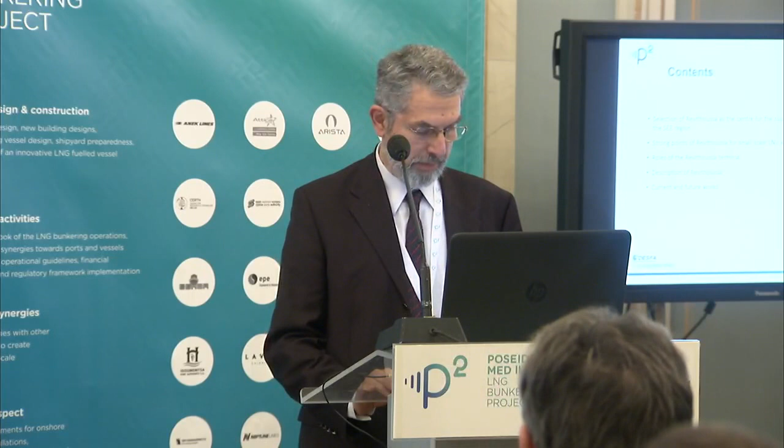Thank you, Chairman. Ladies and gentlemen, I'm Joseph Florentin, project manager for Poseidon Med II on behalf of DESFA, and head of the new projects department in DESFA. What we are going to see in my presentation is how Revithoussa was selected as the center for the supply of LNG bunkering fuel in Greece and in the southeastern Europe region; the strong points of our terminal for small-scale LNG activities; the roles of the terminal; a description, which is useful for those who have not yet had the opportunity to visit the island; and our current and future works.

Revithoussa is at the center of the Poseidon Med II action because it was selected in the previous Poseidon Med program against two other options. One was the installation of large LNG tanks in the port of Piraeus, and the second was the installation of a floating storage unit outside the port.

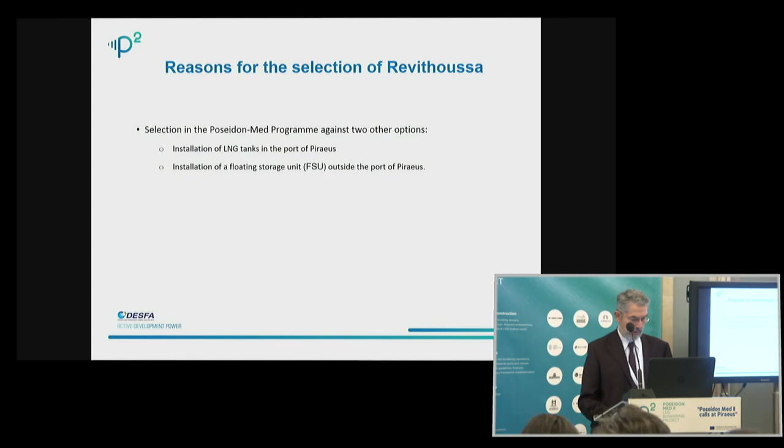Why was the Revithoussa option retained? It was retained for all these very important reasons: it is at short distance from the port of Piraeus, 17 to 18 miles; it offers easy permitting of the additional infrastructure compared to the case when we want to create grassroots installations; it offers, and this is equally important, open access to all users without creating any constraints for the ship owners regarding their LNG suppliers; and last but not least, we have experienced personnel, proud of almost 17 years of safe operation.

Revithoussa fulfills several roles. The existing ones are that it is the most important entry point of the national natural gas system. The other two, as you may know, are one at the Bulgarian border and one at the Turkish border. It covers peaks in demand.

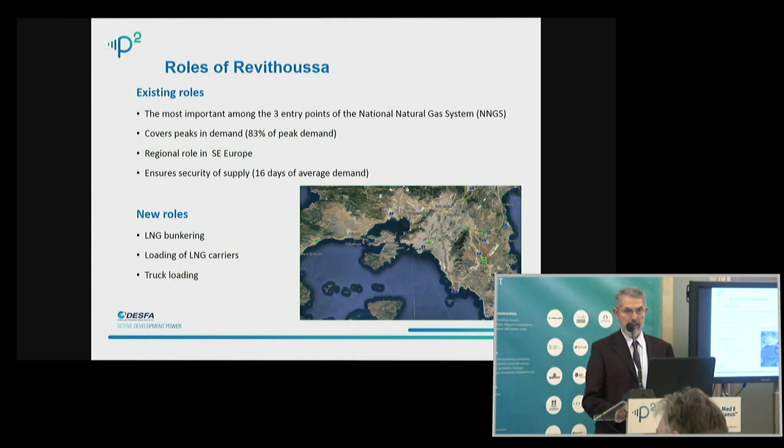It plays a regional role in southeastern Europe, especially nowadays when it is already technically possible to send gas to Bulgaria. And it ensures security of supply, about 16 days of average demand. The new roles for which we are working are LNG bunkering, loading of LNG carriers, and truck loading.

Let's see now a description of this island. At the center, we have two tanks of 65,000 cubic meters each, and the regasification area, the process area. This is the unloading jetty at which the LNG carriers are berthed. And when the gas, the LNG, is regasified, it follows this way up to the send-out point to go to the continent. We have a cogeneration plant which covers all the electricity needs of the island, and the control room.

Concerning the new installations, the prospective installations, a third tank of 95,000 cubic meters is already under construction. If you see a more recent Google picture, you will see that the works have indeed progressed. In this place, the truck loading station will be built, and this is the area designated for the new jetty that will be dedicated to small-scale activities.

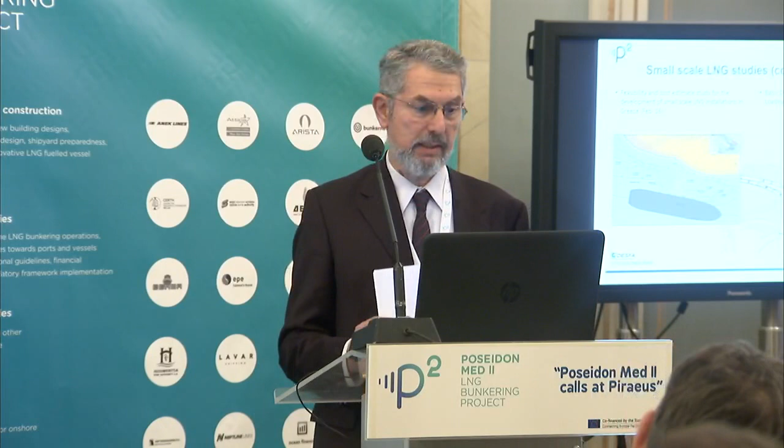What has already been completed is the feasibility and cost estimate study for the development of small-scale LNG installations, whose result was the selection of the position for the new jetty, and also the basic design for the construction of a truck loading station.

What remains to be done: very shortly, until the end of the year, we will submit the preliminary environmental study for the truck loading installation and the new jetty. We will complete the tender documents for the EPC contract for the truck loading station. And we will issue a tender for the conceptual design at 4 ports of the Poseidon Med II program.

Early next year, we will issue the tender for the basic design of the new jetty. And at the end of 2017, although this is outside the small-scale sector, we expect to have the possibility to load large LNG carriers. The ships that now can only be unloaded, we will be able to load them as well. In 2018, the operation of the truck loading station will start.

And at the end of 2018, although this also goes beyond the Poseidon Med II program, we expect to have the possibility of loading small LNG carriers with the addition of a new arm on the existing jetty. So, from our side, we expect to be able to supply the first ship with LNG well before 2020. Let's hope that everything will run smoothly and the expectations will become a reality. Thank you.

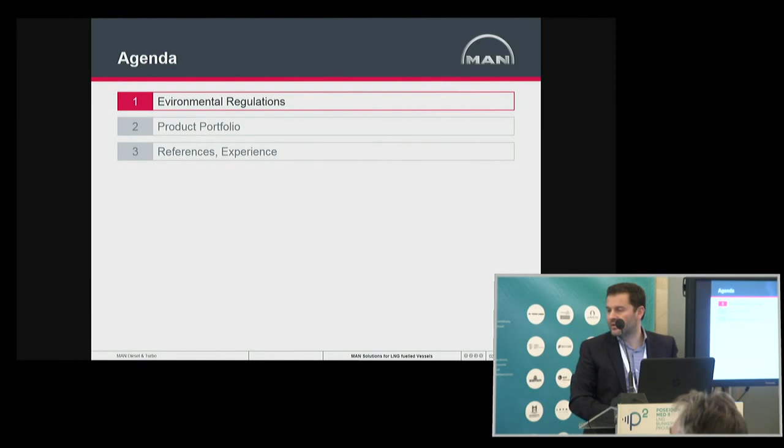First of all, as far as I have seen in the previous sessions, you allocated a lot of time talking about environmental regulations, so I will not stay on this, just to highlight that we already have established ECA areas, mainly in the US and the North Sea, and in the forthcoming years new ECA areas most probably will come into force. What is granted is the escalated sulfur content that we have to comply with in the next years. We see also in this graph the development that took place over the last many years in terms of SOx emissions and NOx emissions.

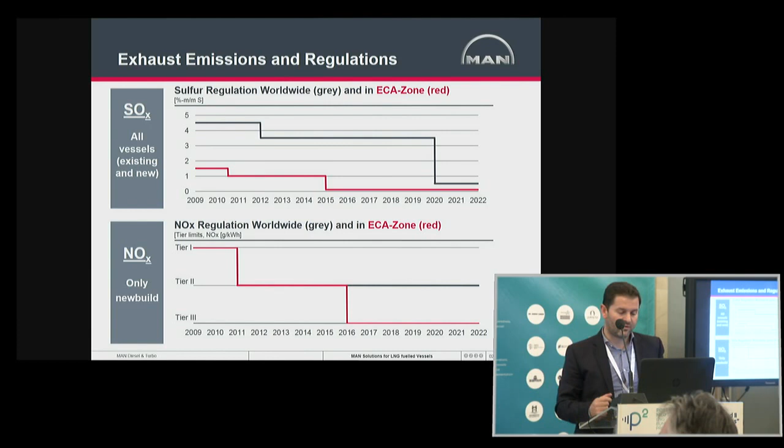We see that by 2015 and 2016 it will become more strict. And of course by 2020, especially for SOx emissions, we will be enforced to burn fuel oil with very low sulfur content. What we have done, what we were trying to do, is to reduce the SOx, the NOx, and the CO2. There are some examples of how we are doing this via scrubbers or EGRs or high-efficiency powertrains, but the answer to most of them is the use of gas.

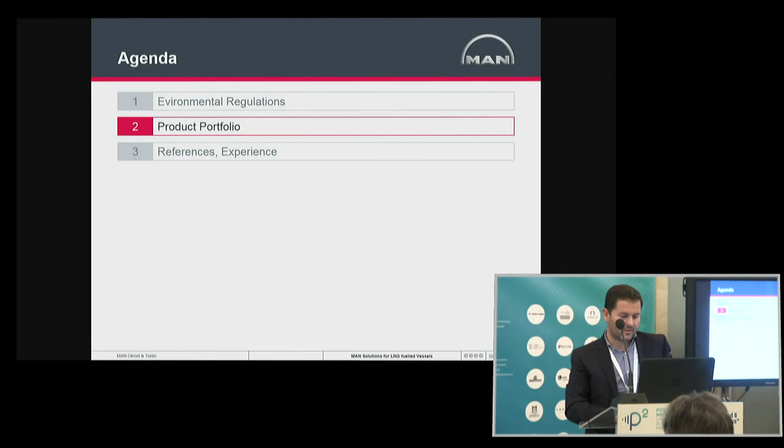Now, product portfolio, what we can offer you. I took up as an example the RoPax model, where we can offer from the gas storage and supply system, the gas valve units, the dual fuel engines, 4-stroke at the moment for this type of vessels, up to the propulsion system, up to control and high efficiency propellers.

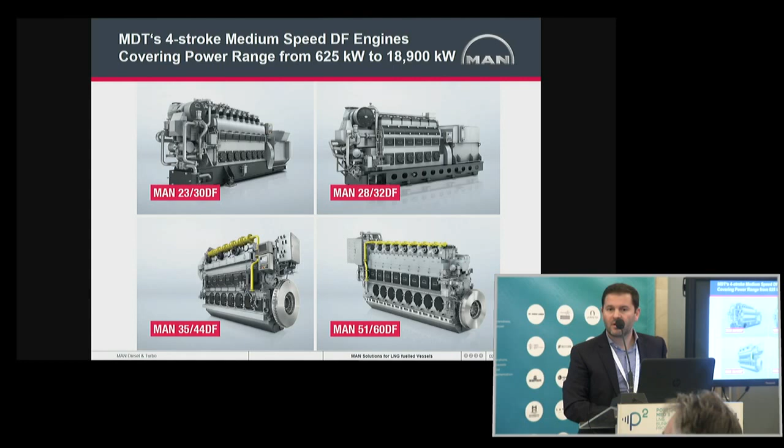More specifically, we have a huge range of dual fuel 4-stroke engines from around 600 kilowatt up to close to 19,000 kilowatts propulsion, but also electrical generators in the vessels. And because very often we are asked what happens now and how we can prepare ourselves in the future, almost all of our engines can be easily prepared to burn LNG some years after.

Here is an example of a dual fuel oil engine prepared that shows some parts like, for example, the gas pipes, the gas valves that have been already installed and can be used afterward quite easily with some minor changes also to burn LNG.

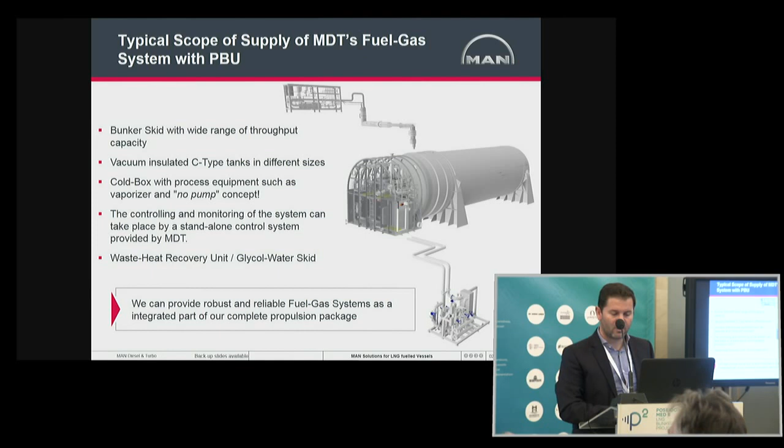We can supply different types of valves and we can also supply C-type tanks with cold boxes and the whole train of the treatment of the storage system. This is the example of a 4-stroke setup, but also we have a presence for the 2-stroke engines.

The well-known, in the last 2-3 years, ME-GI engines, which is actually the version of the existing 2-stroke ME engines. We can deliver new engines from 2013 already prepared to burn also LNG, but not only LNG, also ethanol, propane and other alternative fuels.

This is another example of a vessel, a container vessel, which actually is a reality nowadays, where we show how we develop this system and how we arrange in the engine room the whole system: the main engine, the electrical power, the electrical generator engines, and of course the gas valve system, the compressors, and the fuel tanks.

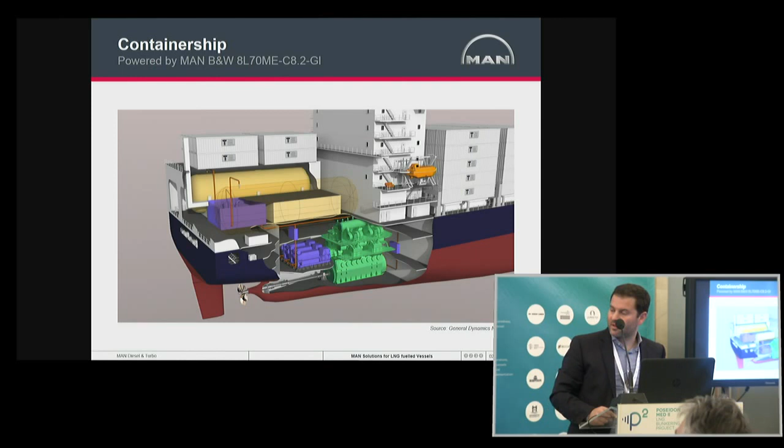So, in one slide, the MEGI and LGI, where they can burn alternative fuels, don't have the methane slip effect. They can easily operate in heavy weather conditions, and it is already here. We have already thousands of hours in operation for a couple of vessels that operate mainly on the US coast. However, we are not only for the diesel engines, we are here also to propose rotating elements.

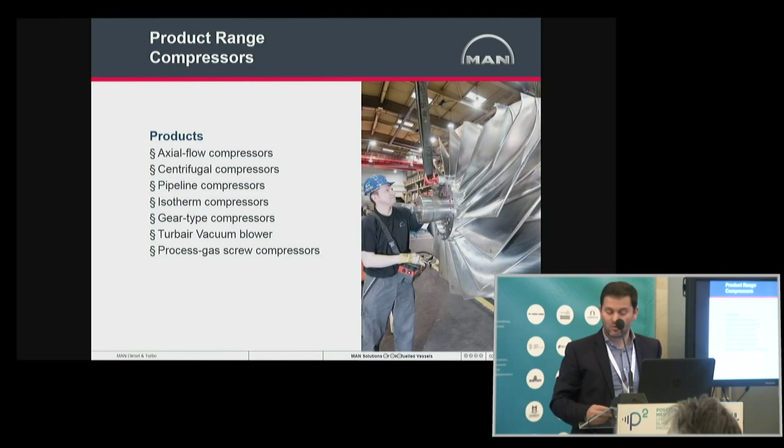More specifically for gas transportation and gas storage, we can propose a large number of compressors, gas compressors, but also for power generation, gas turbines of various sizes. Here is an example about the range of the outputs that we can supply in the market.

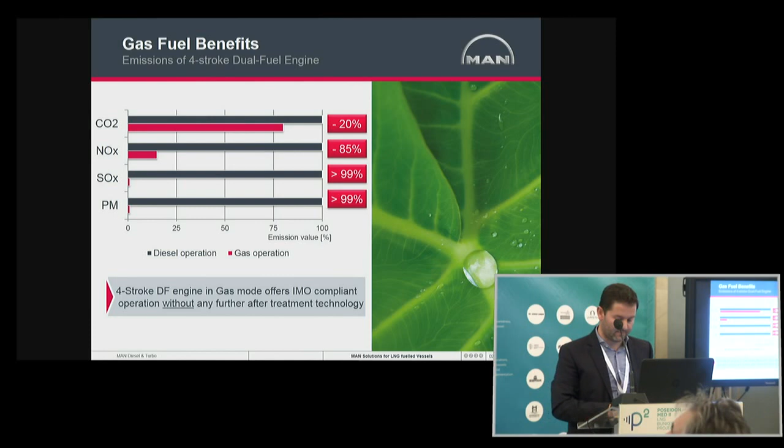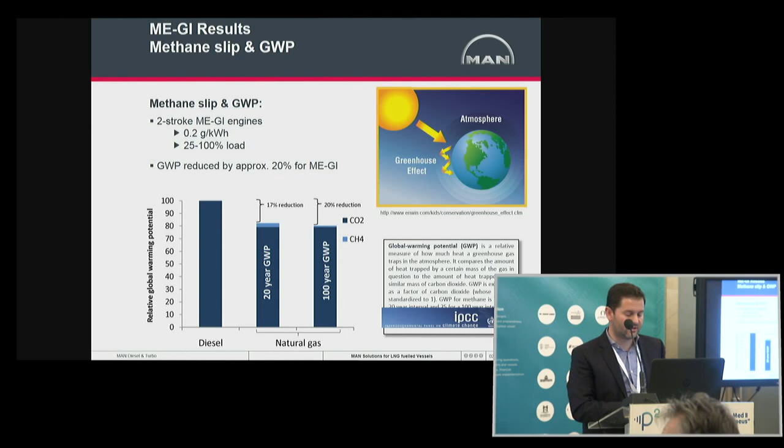And in regards to reference and experience, we have executed several projects, new projects and retrofits, of course. For four-stroke, for example, we are converting right now under the German state austerity program one small container vessel, quite young, built in 2012, and we will offer the entire package of equipment that I showed you before. It means from the gas storage up to even the propeller, and to improve also the operational profile of the vessel.

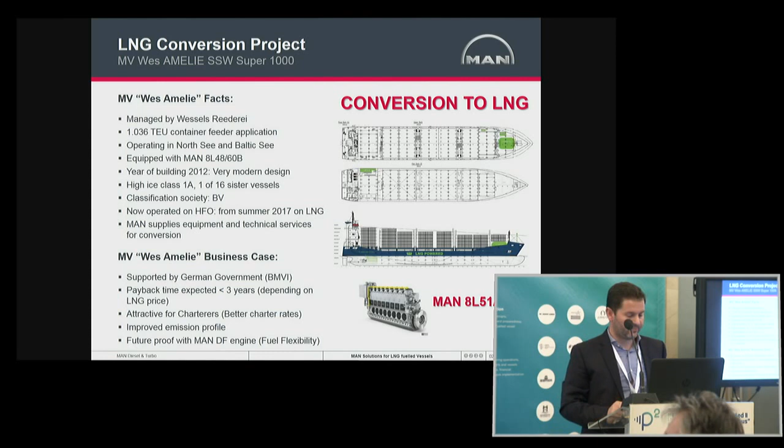We have decent experience, close to 8,000 hours now, where all the initial problems have been solved, and the vessel is running under very normal conditions. The only problem faced by the operator is that on one side of the route, they cannot find LNG yet, and this is what the industry has faced. So we operate half of the route with HFO, again without any problem.

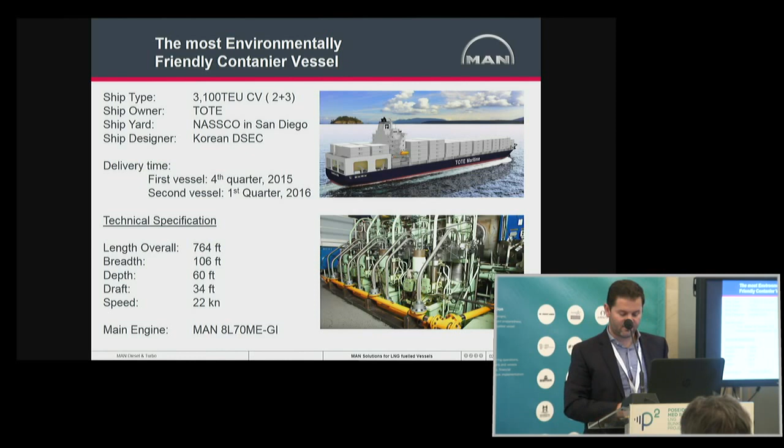Also another order which is ongoing with ethane fuel oil for Hartmann Reederei, with the full equipment that we can offer, including CPP propellers, shaft alternator systems, and other peripheral equipment.

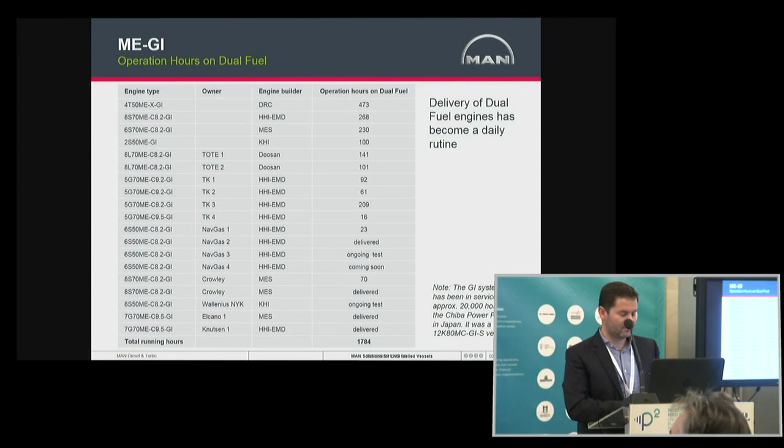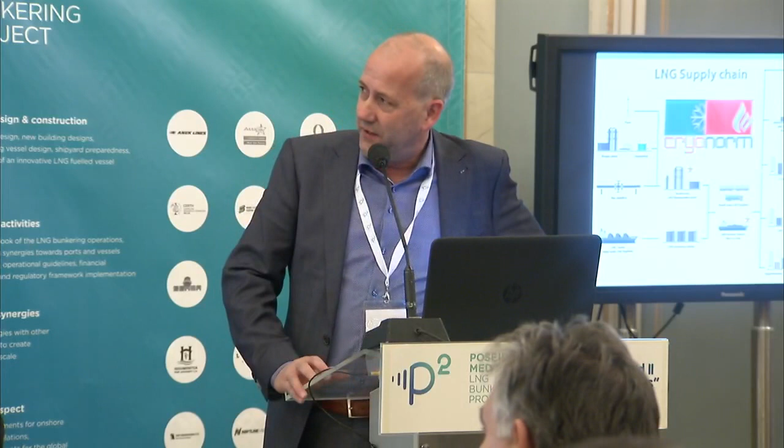For the LNG, we are active everywhere. So our company is building small-scale LNG infrastructure, from small-scale liquefaction plants, LNG logistics, LNG bunker terminals, LNG fuel systems on ships, LNG and LCNG filling stations for vehicles, and also LNG storage and regas plants.

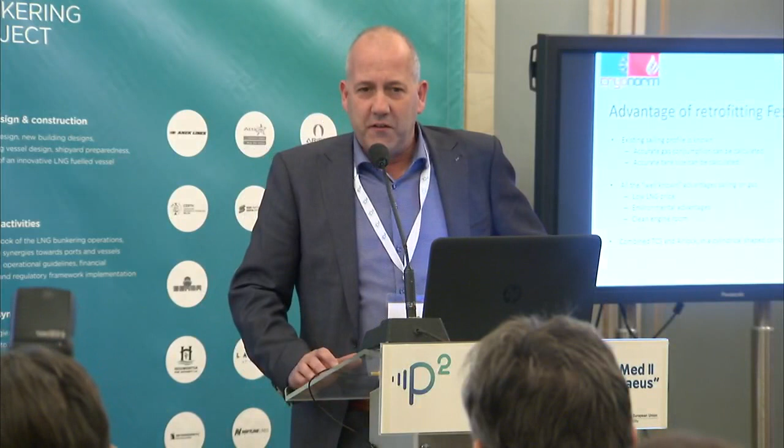The retrofit of Festos Palace to dual fuel LNG - we have done a basic engineering study to see the possibilities of retrofitting the Festos Palace. The advantage of retrofitting an existing ferry is that we have accurate gas consumption data, and we know from experience over the years what the ship is using.

So we can calculate the accurate LNG tank size. Well, all the well-known other advantages are there, like low LNG price and environmental advantages. Another thing is that the engine room will stay clean if you sail on natural gas instead of diesel.

This graph gives you the fuel consumption, the gas consumption of the Festos Palace.

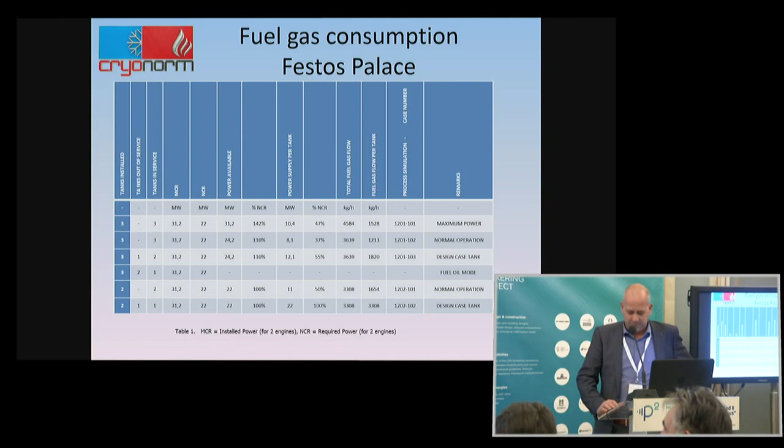The challenges we had for retrofitting the Festos Palace is the heavy and large cylindrical type C tanks, which need to be installed on the existing structure of the ship. So we needed extra construction works on the tanks, which have 5 saddles under each tank. And we have 3 tanks of 150 cubic meters.

Another challenge was to find a suitable pipe routing for the LNG bunker lines from the bunker terminals to the tanks or to the tank connection space, the natural gas pipes to the engines, heating lines, and the location of the vent lines.

The other challenge is we have to find a good spot for the bunker station with the airlock. Our idea was to have a second bunker connection on the car deck for bunkering truck to ship.

This is a schematic overview of the overall system. This is from the ventilation system, but it also gives the idea about the complete system as we have designed it. You have the gas feed to 2 engines, 2 main engines, 3 tanks, 3 tank connection spaces, 3 airlocks, and 2 bunker stations.

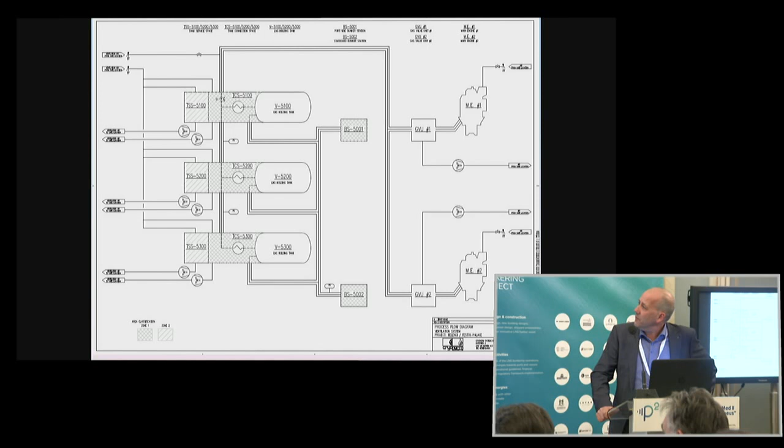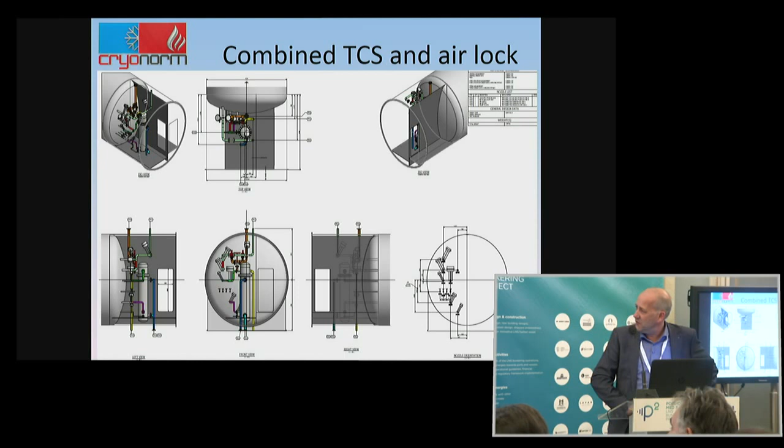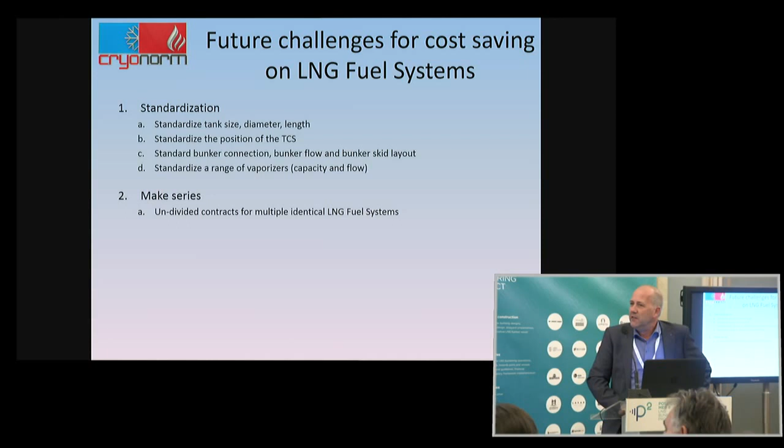The future challenges for cost savings on LNG fuel systems is standardization. We need to think about standardizing the tank diameter and length, the position of the tank connection space, design a standard bunker station, and we have to make series. Now we still make prototypes. We receive quite some orders, but every ship is different, and for every system we need to reinvent the wheel. So this will not help to bring the cost down.

After this ship we have done 2 ships, the Green Stream and Green Rhine, sailing for Shell. These are gas electric ships, so not a dual fuel propelled ship but gas electric. Each ship has 2 tanks of 40 cubic meters, and in the container there are the gensets of Scania.

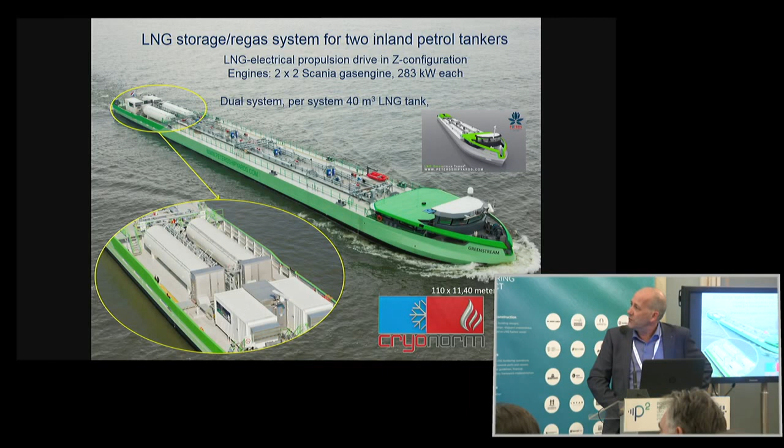After these inland waterway vessels, we have done 2 short sea going ethylene carriers for Anthony Veder. Those ships were built in China, and we shipped our LNG fuel systems to China and integrated them at the Chinese yard. They sail since 2012.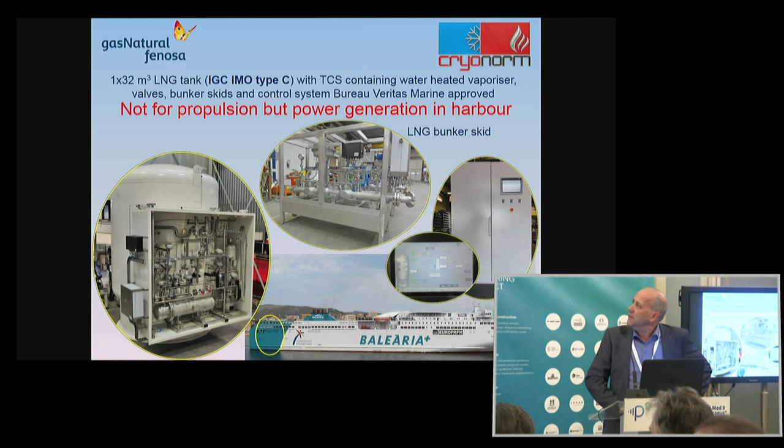This project, we recently signed the contract, which is the Eco Delta. It's a dredging vessel for Van der Kamp. It will have a 325 cubic meter tank on board, and the special thing is that the tank diameter is 7.4 meters. So it's a huge diameter, a very short tank, only 11 meters long.

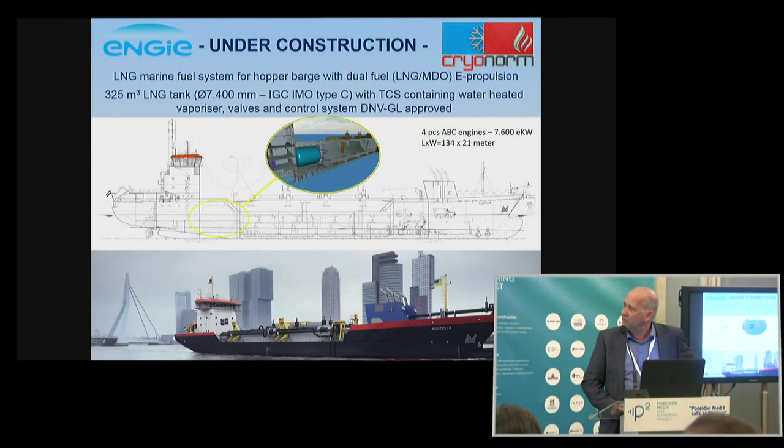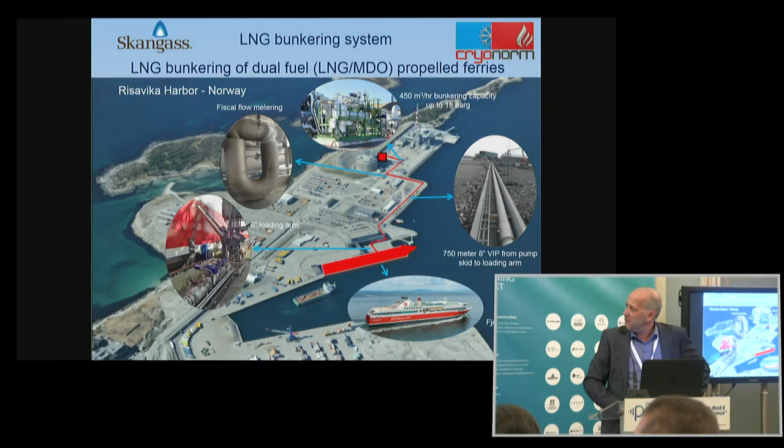LNG bunkering: we built an EPC contract for Skangass for an LNG bunker terminal in the Risavika port in Norway, where we installed about 750 meters of vacuum-insulated pipe from the existing terminal to the passenger terminal, where the fjord lines are bunkered. On that project, we built the flow meter packages, the pump package, the loading arm, the ESD skid. This was a turnkey project for us.

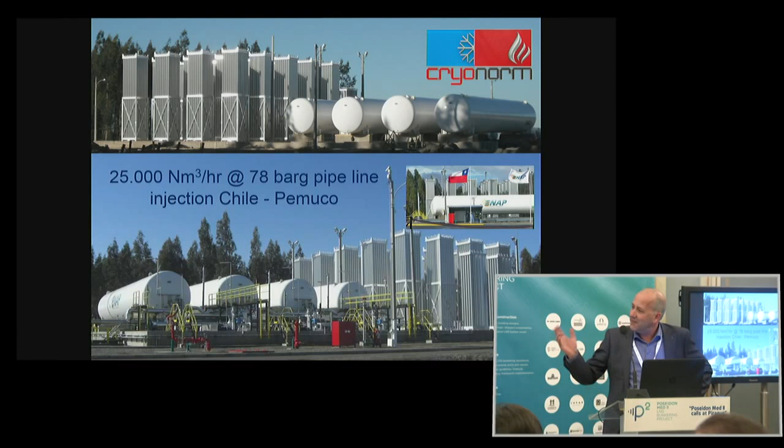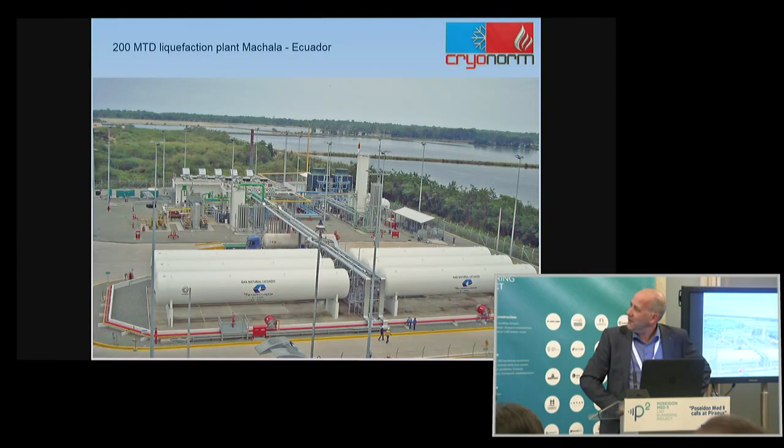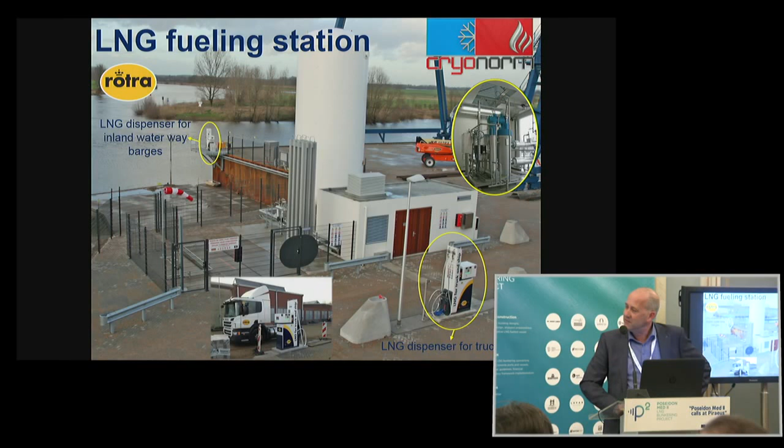Fueling stations, public fueling stations, LNG and LCNG. This is another LNG filling station where you can also bunker small barges from the same filling station. And that's it. Thank you.

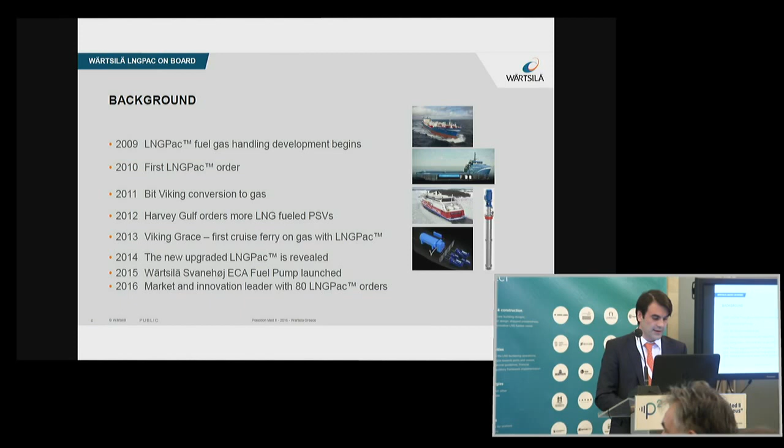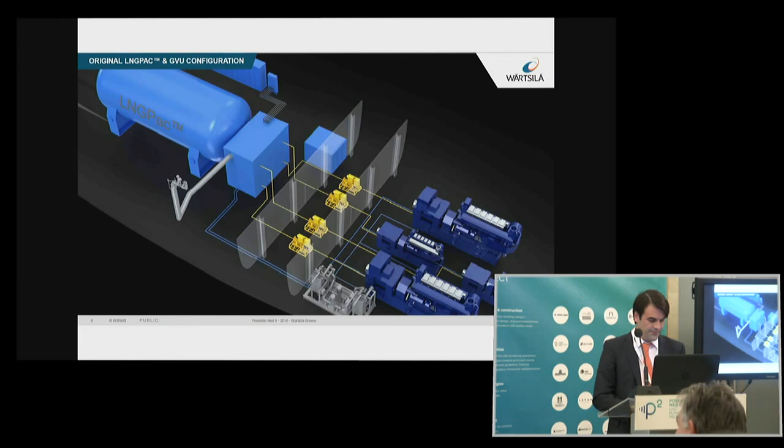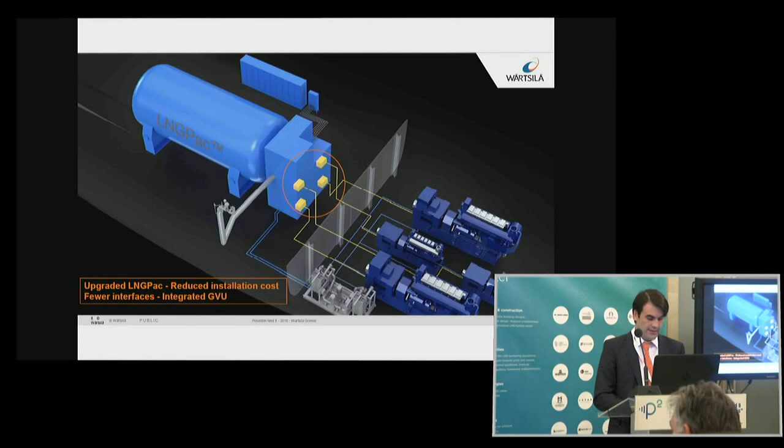On this slide, we can see the upgraded LNGPac with the possibility of having the gas valve units on the engines, or as we will see on the next slide, the GVUs integrated in the tank connection space. The heat media skid as well has been integrated in the tank connection space. This has resulted mainly in maximization of space utilization and fewer interfaces.

A further development is the multi-lobe Type C tank, which can offer, in certain cases, better space utilization. Here we can see on the right hand of the slide the multi-lobe tank. Of course, it is expected to have a slightly higher cost than the typical single-lobe tanks.

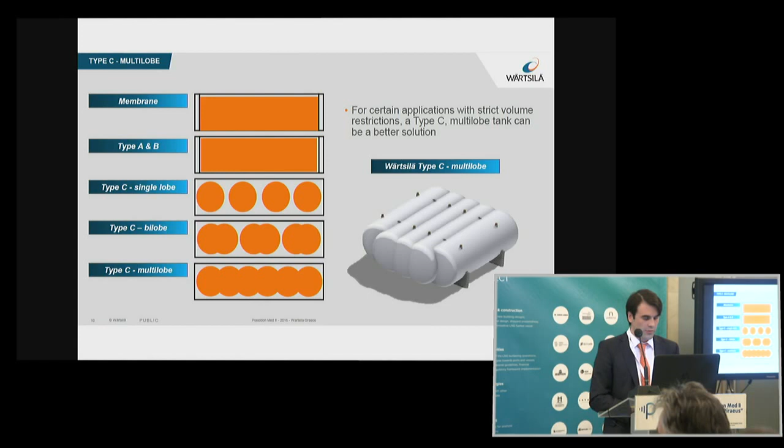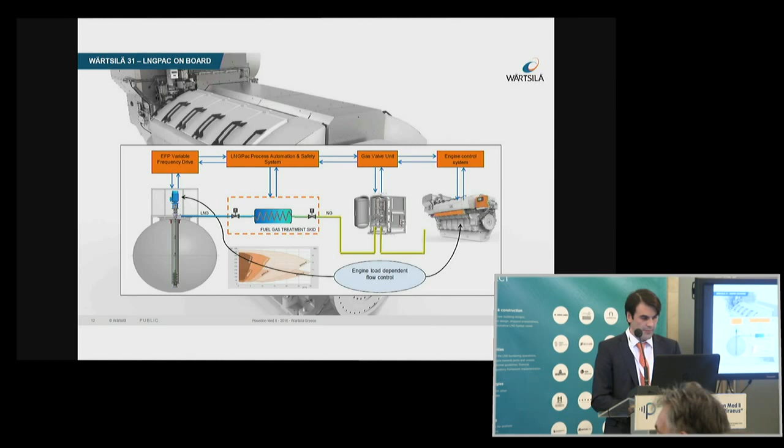Now we would like to give an update on the recently announced very efficient four-stroke engine of Wärtsilä, which can be selected or retrofitted in the future as a dual fuel engine able to burn LNG. Concerning this engine, due to the slightly increased pressure required, which is less than 12 bar, a pump will be required in the tank, and the arrangement with the pressure build-up configuration, considering also the pipe losses, will not be possible. So on this slide, we can see the pump required for the W31DF engine.

Because of the ship's extensive accommodation facilities and the need to prioritize passenger comfort, stringent standards to reduce noise and vibration will be applied to the Wärtsilä main and auxiliary engines, propeller, and maneuvering thrusters.

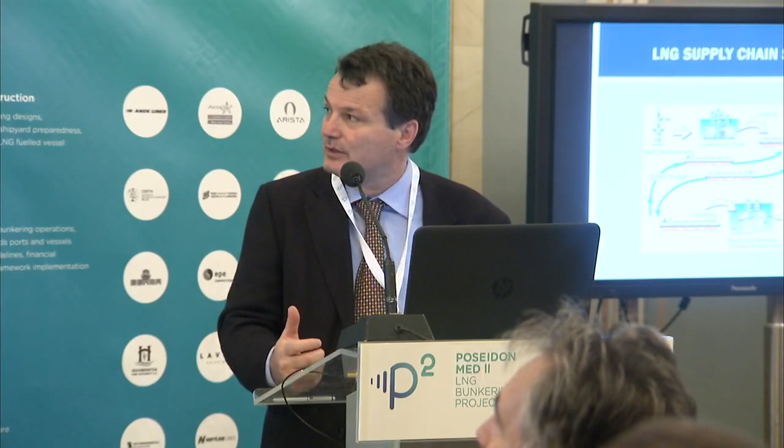This slide shows these interdependencies. I think we saw a similar slide before, and I'm sure all of you here are more experienced with this supply chain of LNG and other supply chains that we see in the ports. We can see here that we start from the fields and go to the liquefaction plant, then move the products, store and distribute them, and use it for power generation or other groups. These are complex processes that we have to take and model.

So we have to be ready to evaluate the risk associated with this information technology, especially in situations where we have new products, and especially where there's always a fear that these new products have something dangerous, in quote marks, and so on. So if you put information technology on top of that, we better be careful before we start and design these systems extremely carefully.

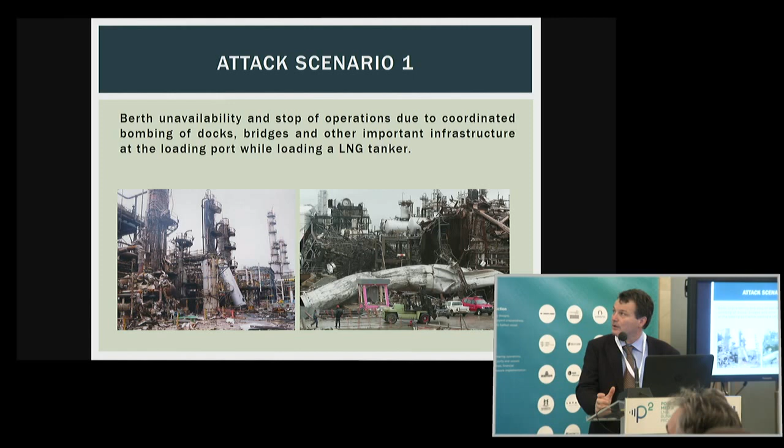In the project, we are going to look at some, as we call them, attack scenarios. We'll look at different applications. In the LNG application, we can see an attack scenario where there is an unavailability issue and stop of operations because there's a coordinated bombing while loading a tanker.

Another attack scenario in our evaluation is hijacking, which is something we've seen happening many times in the last 5 to 10 years, especially off the coasts of Africa. And there's an extreme scenario where we compromise the LNG stock while there is an increased demand for LNG due to a very cold front.

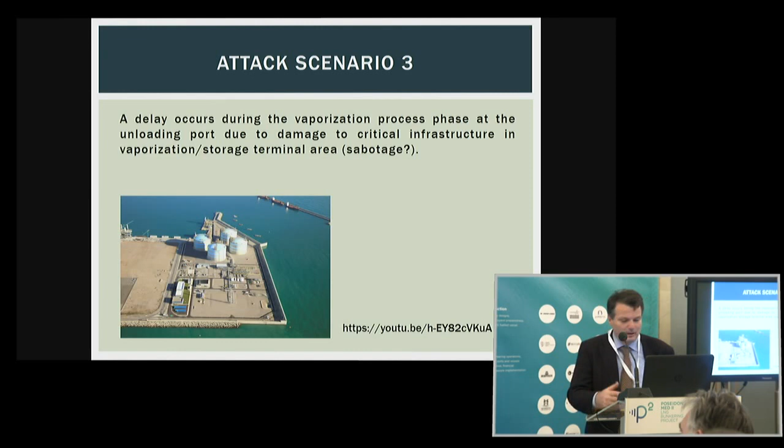Another scenario we are going to evaluate is the delay that occurs during the vaporization process because critical infrastructure has been damaged, either by some event we don't know or by sabotage. The last one is a classical attack scenario involving a hacker entering the information systems of the LNG supply chain, trying to steal information—accounting or any other type—or maybe change some of it, and then we have to evaluate these scenarios.

In order to do that, people working in risk management are usually aware of the process to work with. What we do additionally is that in classical strategies like risk estimation, impact analysis, vulnerability analysis, threat analysis and so on, we add stages that involve the information technology we have to take into account and what problems can happen there. Then we evaluate the effects and vulnerabilities and try to find priorities in what we have to protect and where we need to pay more attention.

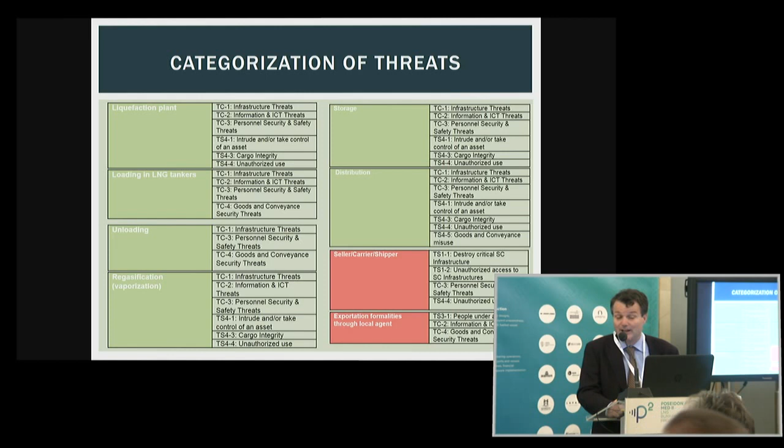What we try to do is transfer them into the physical world in this scenario of the LNG supply. In general, in the project, as in this scenario as well, we look at interdependencies between the different processes, because if something happens in one place in the supply chain, it's going to affect the other places.

What we do in the project—I think it's too late now to go into the math—but we have a good group of people who are very good in graph theory, trying to find dependencies and estimate risks in a very efficient way.

I will skip the next scenario because it has all the mathematics there, and just finish up saying that we have developed a first version of the system. You can go to the site mitigate.europrojects.net and try to play around with this tool we have for risk assessment. We'll be very glad if you have comments to improve this, and we'll be glad to share the results of this project and share your thoughts.

To thank in this project—I think in the first slide you already saw the names—my colleague at the university, a big proponent of port information system infrastructure, security and mitigation activities, Professor Polemi, could not come here because she had another assignment, so I took her role here.

And also Rafael Company and David Insertis, our colleagues from Valencia, but also all the other partners in the project from Germany, Fraunhofer, Eurofar, University of Brighton, the Port of Piraeus and Valencia Port, and several other organizations. A very big group and a project we are really looking forward to its results, because these results build on our previous work, and hopefully we're going to have a risk assessment tool that is efficient, effective, and really usable, using all the latest information technologies. Hope I was on time. Thank you.

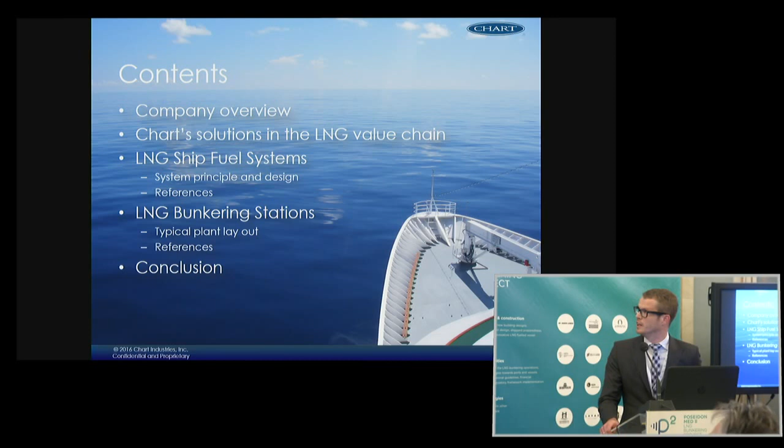I'll start with a brief company overview for those of you who don't know Chart yet, then drill down to the LNG value chain solutions we have, and more specifically the LNG marine solutions, ship fuel systems, and bunkering stations. This is our CEO, and if I may quote him: no single company in the world delivers as broad a range of natural gas-related solutions as Chart Industries, from natural gas separation, purification, and liquefaction to the distribution, storage, and dispensing of LNG.

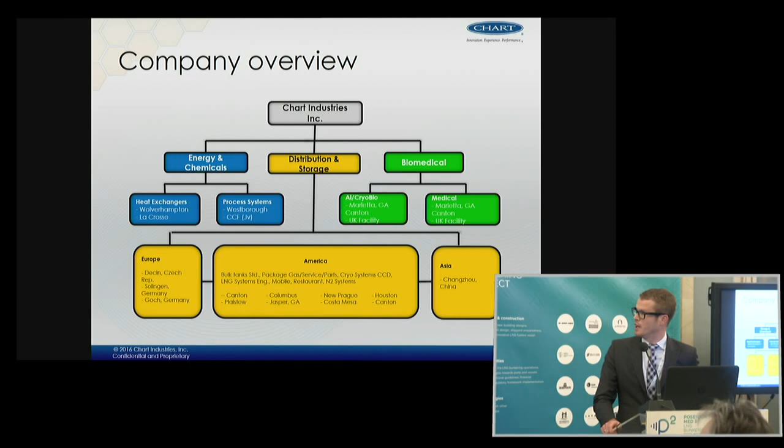This is just to highlight that we're active in the whole value chain, and I have some more slides on that. We are divided into 3 divisions: energy and chemicals, distribution and storage, and biomedical. No need to go into details here. The distribution and storage division handles mostly the applications discussed here today, and we have operations in Europe, America, and Asia. Energy and chemicals is our division which manufactures liquefaction plants and brazed aluminum heat exchangers. We'll talk more about distribution and storage. Biomed is a division offering solutions for respiratory care products and lab storage systems.

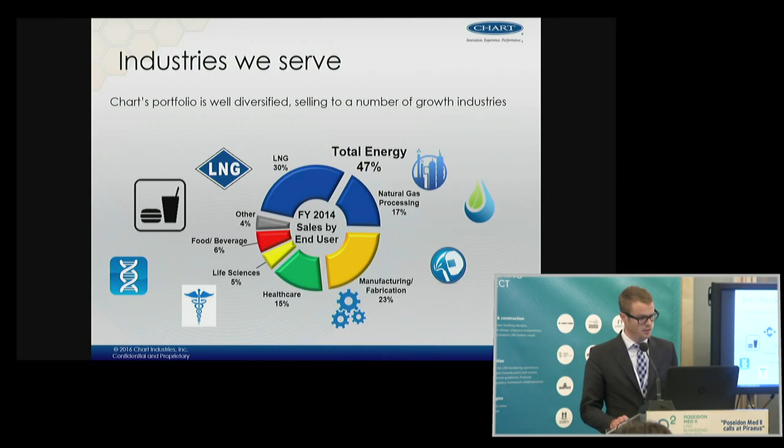Not a topic today. The message is really that Chart is a cryogenic technologies company. Our sales in 2015 was just over 1 billion. We have 5,000 employees in approximately 15 countries. 47% of our revenue comes from the energy market, of which 30% is LNG related. These are the locations; here in Europe, our main location is in Děčín in the Czech Republic.

This slide shows an overview of the value chain production, as I touched on the liquefaction. Then we go further down: distribution, ISO containers, LNG trailers, all kinds of distribution applications, infrastructure, LNG stations for vehicles, satellite plants as we call them, and end-user applications, for example vehicle tanks or ship fuel systems.

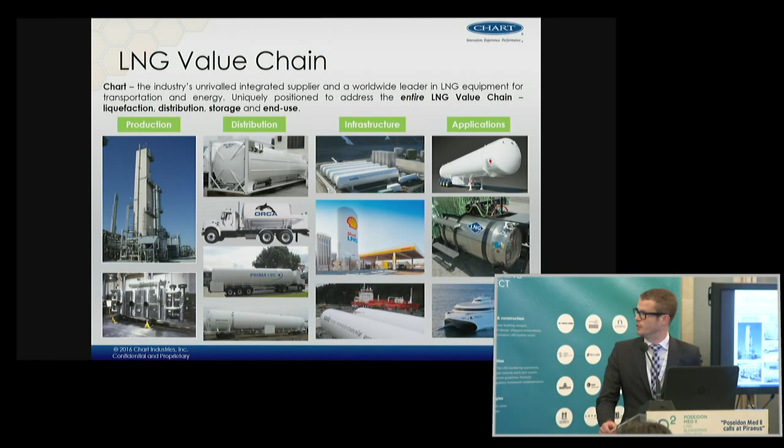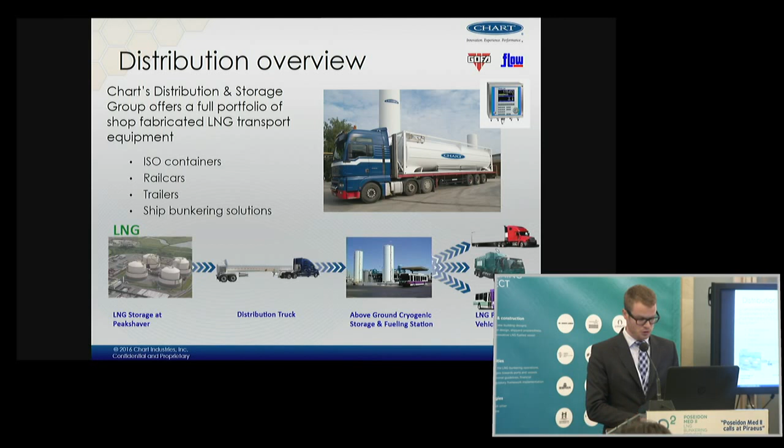I will go over these slides; feel free to go through this and come back to me later if you have any questions. Distribution, as an overview: ISO containers, rail cars, and ship bunkering solutions, which I will talk more about.

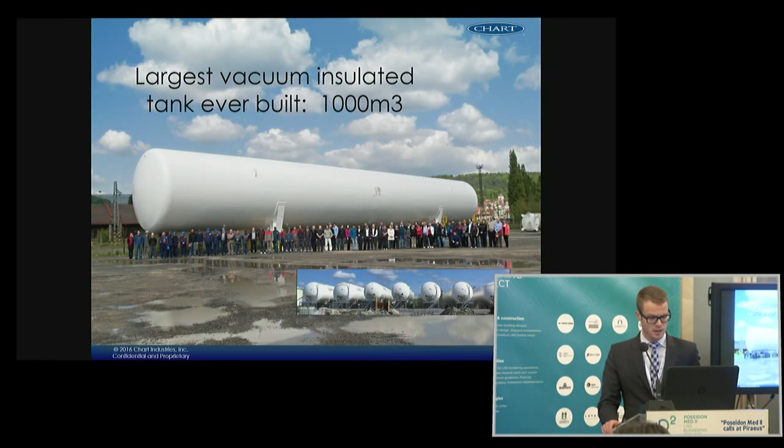Storage: bulk engineered tanks as we call them, vaporizers, vacuum insulated piping. This is all part of the bigger plants we build, for example in Norway, where we've done quite a number of projects, but also all over the world. The largest vacuum insulated tank ever built was built in the Czech Republic, and we've built several others in our plant in the US - 1,000 cubic meters, 6 meters in diameter, about 45 meters long.

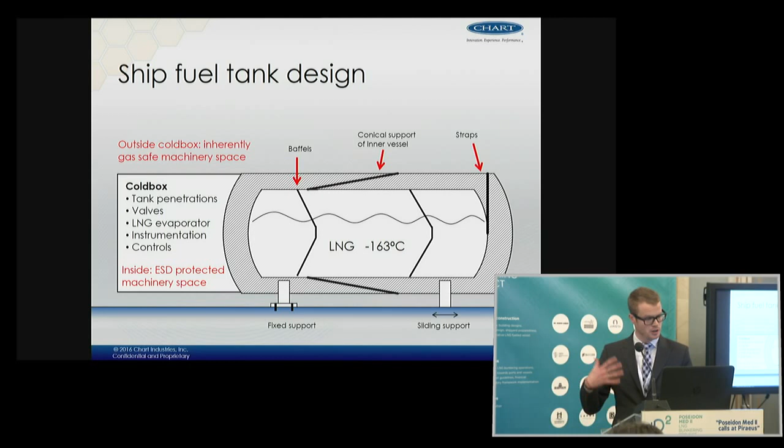It's an ESD protected space, so it's the gas hazardous space, and outside is a normal conventional engine room. Just an example of such a solution.

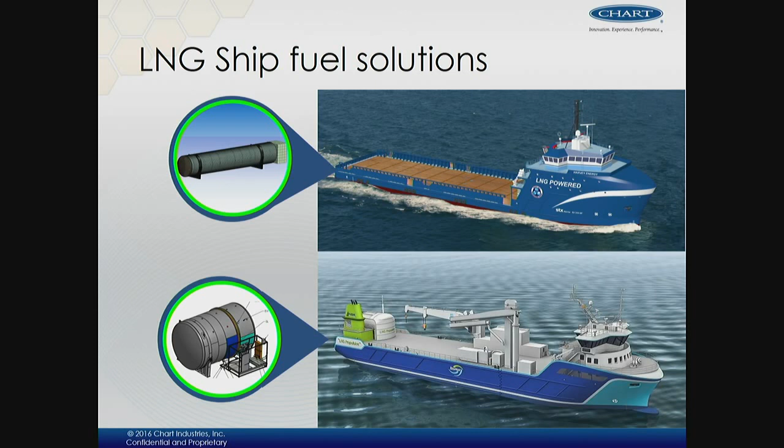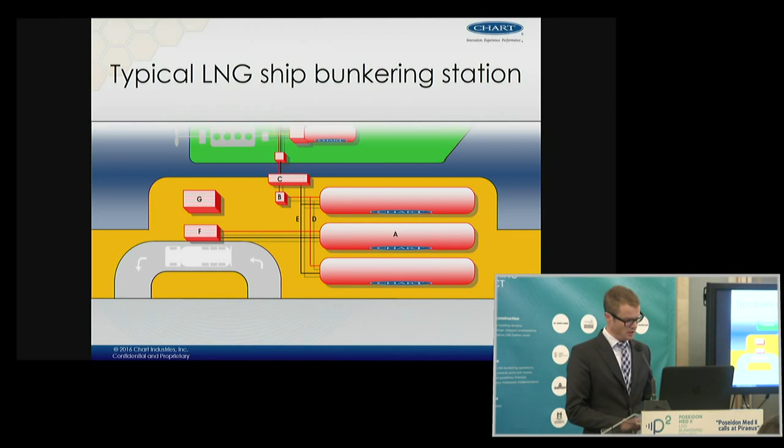The advantage of bullet tanks, meaning C-type tanks, is that it's very easy to expand, for example, or even go down in number of tanks. You can relocate them, take them from their foundation and transport them to another location in case the business asks for a different location.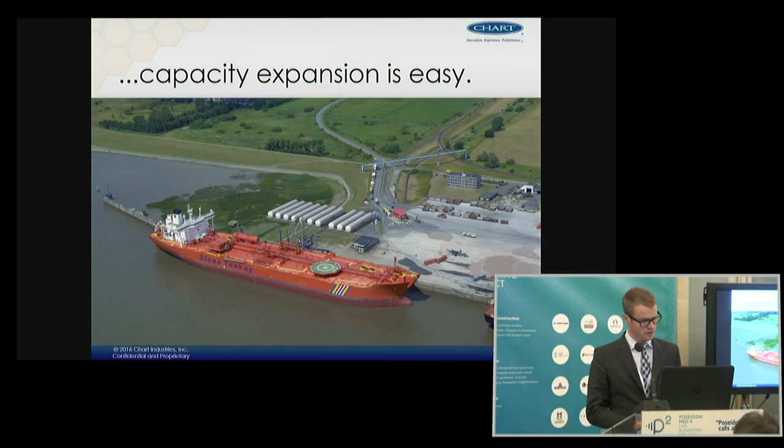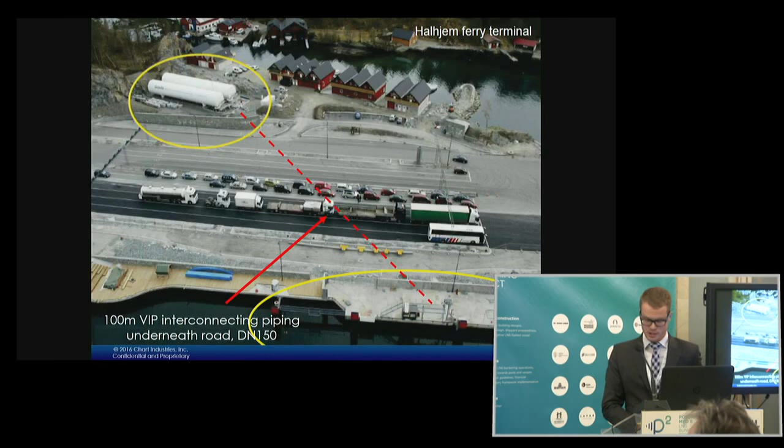This is one of a dedicated bunkering station in Norway, in Halhjem, with 2 500 cubic meter tanks. You can see the filling module. Let me show some more pictures. These are the tanks, there's the pump in between, and there's a vacuum insulated pipe underneath the road which goes to the filling jetty module. This is what it looks like from the air. The filling module, so here's where the bunkering takes place.

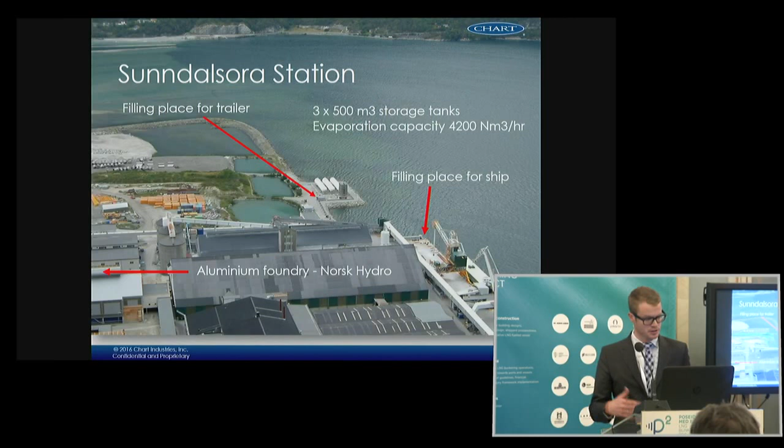Then we go to a more multifunctional station, Sunndalsora. Not only bunkering, it's also evaporation, and it's also a filling place for trailers, so multifunctional. Mosjøen is the same, also a multifunctional station, 5 times 683 cubic meter tanks. Here is another bunker station in Bjuggen in Norway, also with the capacity of evaporation, so it's also the gas supply.

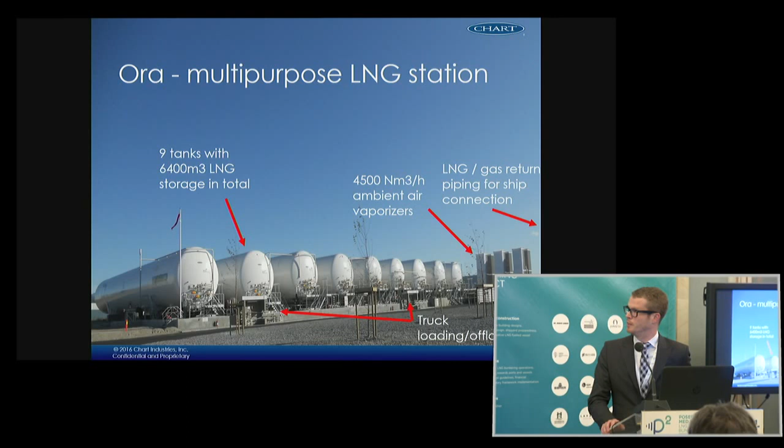This is the biggest one that we've built so far, Øra in Norway, just south of Oslo. In total, 6,400 cubic meters of LNG storage, divided over 9 tanks, like this. And this is the last project, which we more recently contracted, in Klaipeda, 5 times 500 cubic meter LNG tanks. Evaporation, it's also very multifunctional, and it's quite challenging. We're doing it also as a full EPC.

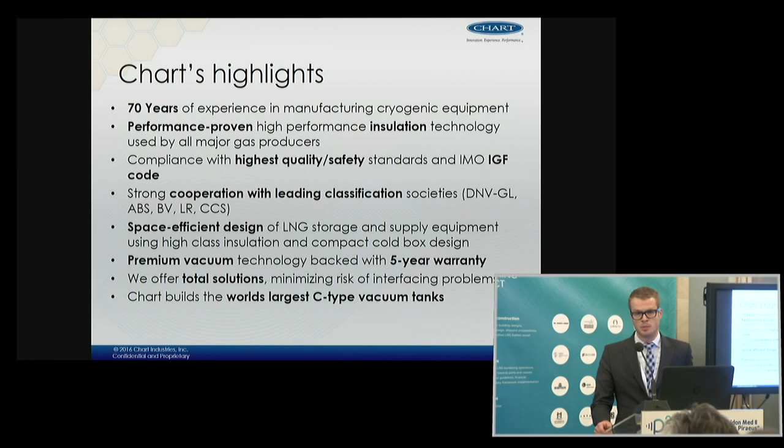So to conclude our highlights, we have 70 years of experience. Actually, this year is our 75th anniversary in our plant in Czech Republic. So there's a lot of history, a lot of knowledge. We have performance-proven high performance insulation technology. We comply with the highest quality and safety standards. We cooperate with the leading class societies. We try to make it as space efficient as possible. Our vacuum technology is premium. We have a 5-year warranty on that, and we offer total solutions, so it's a one-stop shop if you come to us. Thank you very much.

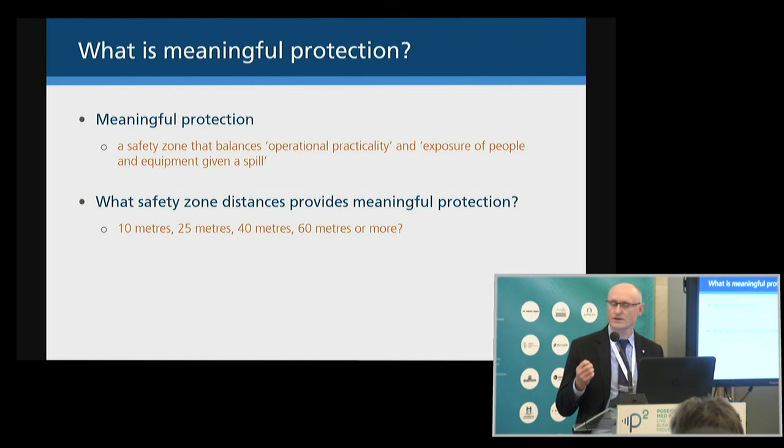So if I had a ship and a certain bunkering operation, and I took exactly the same ship, same design, with the same means of bunkering to a different port, I may set a different safety zone, but I'd want it to be set consistently.

The ISO standard I referred to provides 2 examples of setting that zone. The first one is based on the trapped inventory, basically the amount of LNG within the trapped inventory of the bunker hose. This is released, and they then measure the distance of dispersion of the gas to the lower flammable limit.

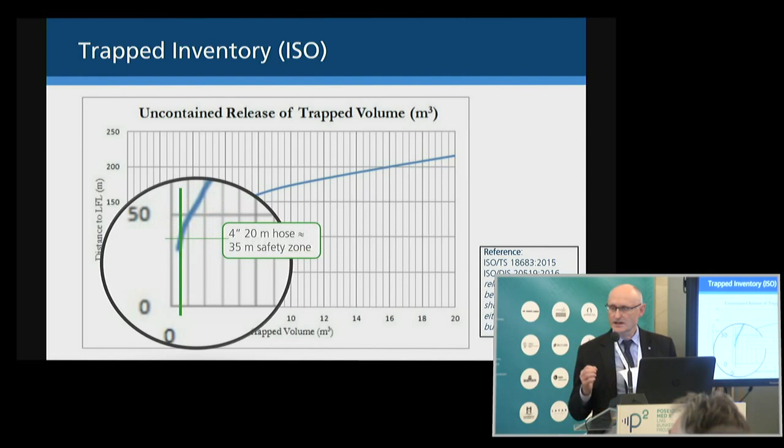If we take a typical example of a 4-inch diameter, that's a 100 millimeter diameter hose of about 20 meters, we see that the safety zone would be about 35 meters. If we increase that, because we want to bunker faster, or we had a large amount to bunker, and we increase that to an 8-inch, 200 millimeter diameter hose of still 20 meters long, then that safety zone would be well in excess of 50 meters.

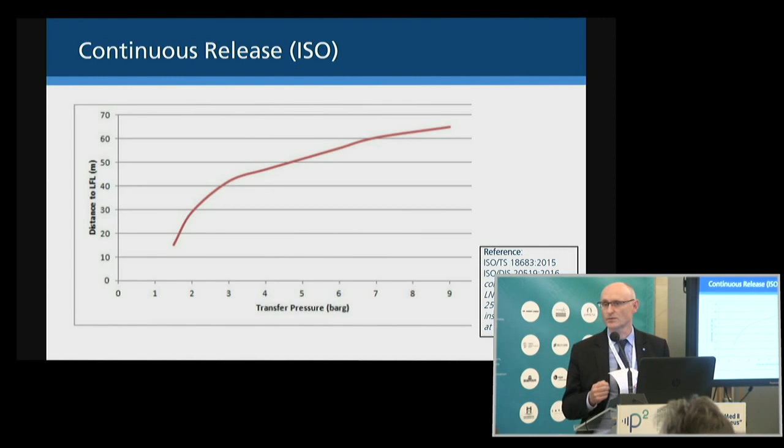The second example given by the ISO standard is looking at a continuous release, where there's a release from an instrument connection, ESD doesn't work, and they continue to supply LNG. If we look at this case, then if we supplied at a fairly low pressure of 3 bar gauge, the safety zone would be about 42 meters. If we increase that, doubled it to 6 bar gauge, then the safety zone would be about 55 meters.

Now, for a cruise ship operator, Lloyd's Register modeled a number of key parameters to identify those that were important in terms of setting the safety zone, because the parameters are not mentioned in the ISO standard. It's simply related to the trapped volume or a continuous release. So you can see here, these are the key parameters we modeled.

First, we're looking at the local weather conditions, so atmospheric stability and the wind speeds. We also modeled the release orientation, so whether releases were actually horizontal, as most people would assume, or they're vertical, or they're pointing downwards, or they're horizontal and actually impinging parts of the ship or other bunkering, such as the truck.

We also looked at release elevation, so whether the release was at grade, 1 meter height, 3 meters, 5 meters. Again, this is quite important for dispersion of the gas. We looked at release pressure, looking from anything from 3 bar up to about 9 bar gauge. And we looked at whether releases were onto land or onto water, which has an impact on the evolution of gas from the cold LNG.

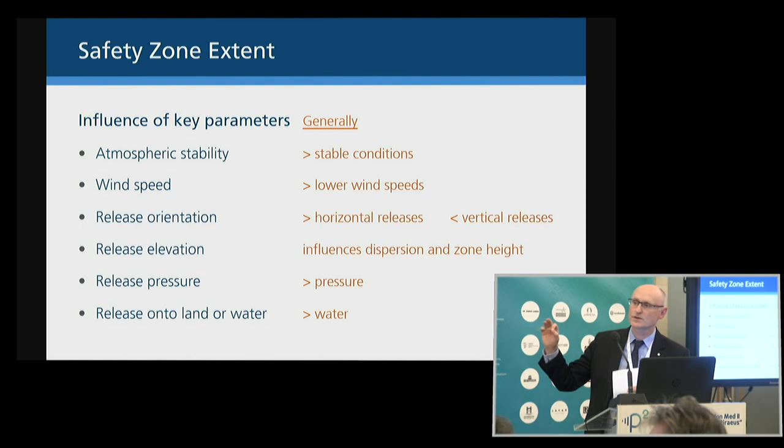Release pressure, as you'd expect, the greater the pressure, the greater the distance. And in most cases, but not all, again depending on the weather, releases onto water gave larger distances than releases onto land.

In summary, the modelling showed the complex interrelation between the key parameters in setting the safety zone. What was key is that it showed there would be danger in setting the safety zones based purely on the two examples given in the ISO standard. What could happen is that you could set a zone that is too short, and therefore don't give meaningful protection, or the zone could be too large, and therefore it would be impractical and difficult to bunker in the port.

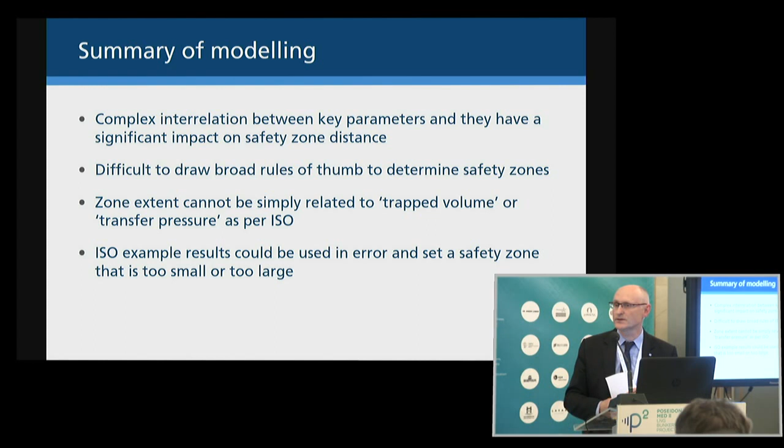So in conclusion, setting the safety zone is actually influenced by many, many parameters, and it's not quite as simple as made out in the ISO standard examples. Because of this, the Society for Gas as Marine Fuel and IACS are now working on a project to see how they can better set the safety zone at ports. So, in essence, further investigation is required to ensure that these zones provide meaningful protection, that they're consistently set in ports so that safety isn't used as a commercial advantage, and that they're set consistently between the ports, and the zones are as small as possible while still providing meaningful protection.

We do have a detailed paper on the safety zone, so if you'd like a copy of that, please see me after, during the reception. I could organise one. Thank you.

So, do we have time for questions, or is it short? Five minutes or five questions? No, five minutes. Oh, five minutes. Okay, well we all enjoyed the session.

Okay, so I'm just going to ask the marine equipment manufacturers and the engine manufacturers. There has been a lot of discussion the whole day regarding CapEx and how CapEx is a drawback for immediate LNG installations. I would like to have your view on what do you anticipate in the future, what innovations may lie ahead, or what other technological trends may lie ahead that may help to significantly lower the CapEx of such an investment.